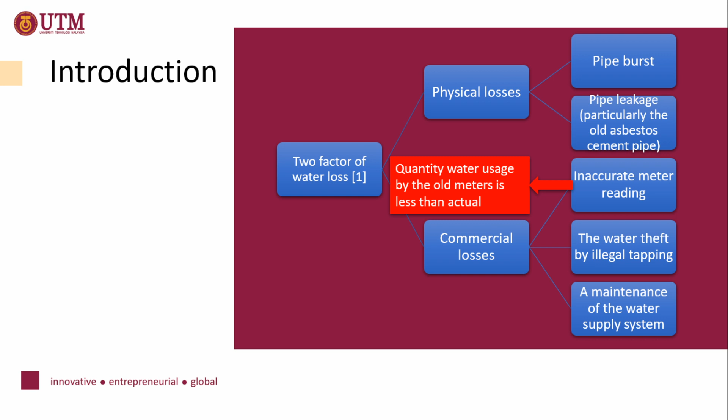For the inaccurate meter reading, it means that the quantity of water usage recorded by the meter is less than actual. And for maintenance of the water supply system, for example pipe flushing after leakage repair work, reservoir cleaning, and brigade usage.

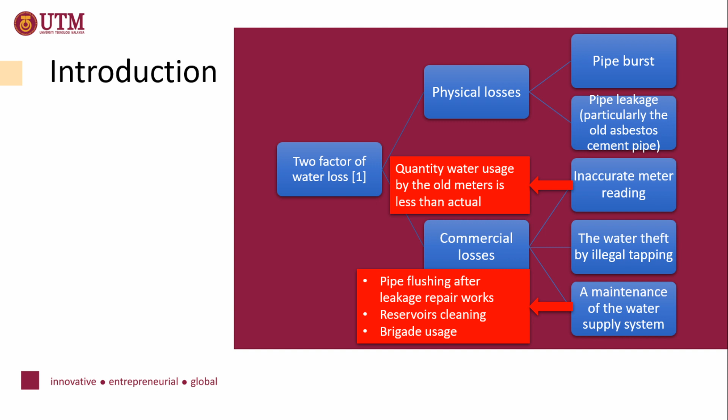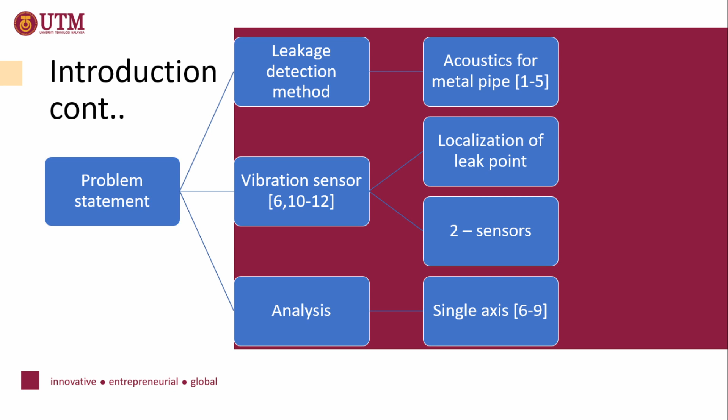The problem statement of this research is, first, the leakage detection method. Nowadays they use the acoustic method, but the acoustic method is very accurate to detect leakage only on metal pipe. Second is the vibration sensor, which is the location of the leak; we can identify the location of the leak with two sensors. And third is analysis. Now they use single axis for analysis.

For the acoustic method on the PVC pipeline there is a problem: because the PVC pipeline is soft and elastic, it will absorb the sound from the leaks. So that's why in this study we propose the vibration sensor.

For localization, we use cross correlation analysis. For this research, we apply cross correlation analysis on two wireless sensor data to identify the location of the leak point. And in this research we use 3 axes. For single axis, normally they put the sensor parallel with the water pipeline; the axis is parallel with the water pipeline.

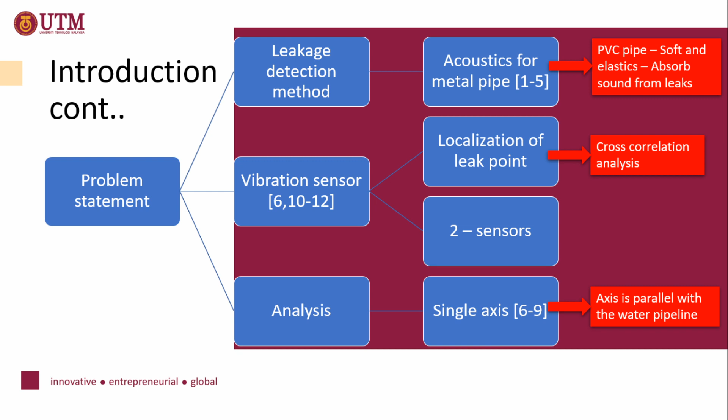This research objective is to investigate the application of the cross correlation technique in localizing the leakage in ABS pipe using a wireless 3-axis vibration sensor, which is the accelerometer sensor ADXL335.

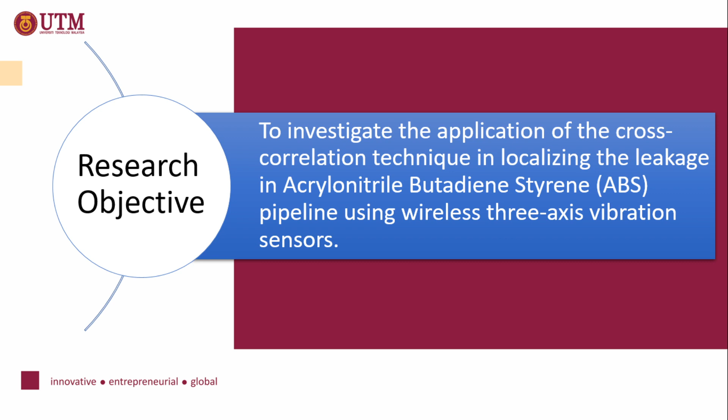In theory, we can identify the leakage location using this equation: distance equals distance between sensors minus wave speed multiplied by time difference, divided by 2. So we can get the location of the leak point.

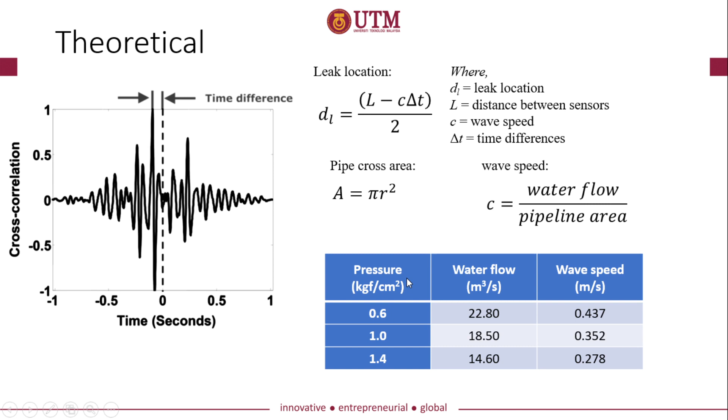Our test bed has a water flow sensor to identify the water flow inside the water pipeline. However, we need to find the wave speed from the water flow data. So we use this equation: wave speed is equal to water flow divided by pipe area. We use a pipeline size of 1 inch, equal to 0.0254.

This is our water pipe leakage localization test bed. First, we have a valve. The function of the valve is to control the water flow and water pressure inside the pipeline. Second is the pressure gauge, to measure the pressure inside the pipeline. There is the water pump, whose function is to give the water flow rate and water pressure inside the pipeline.

There is the meter to measure the water flow rate. Next is the ABS pipe, and then the vibration sensor. For the vibration sensor we use an accelerometer wireless sensor through ZigBee, the accelerometer ADXL335. We use two wireless sensors, then we vary the distance from the leakage from 0.5 to 2.2 meters.

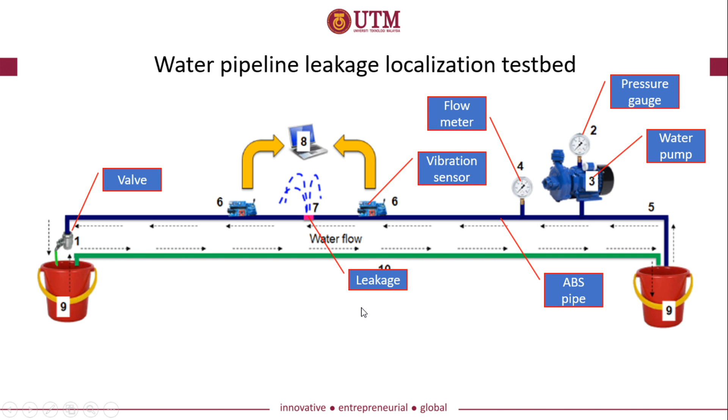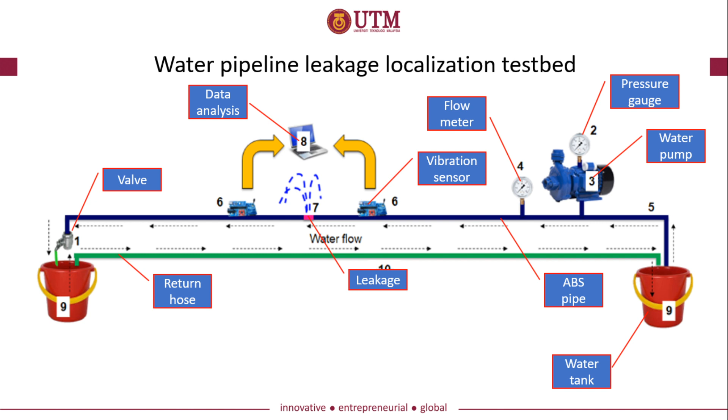There is the leakage simulation. In this case, the leakage is 1 mm diameter. There is the data analysis, to analyze all the data from the sensor offline. There is the water tank to supply water to the system. Return hose.

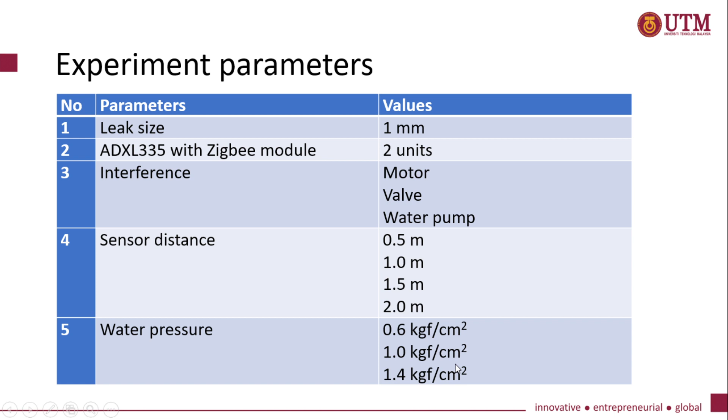There are the experiment parameters. We set the leakage size at 1 mm as I mentioned before. We use the ADXL335 as the accelerometer sensor, through the ZigBee Pro module, interference from the motor, valve, and water pump. For sensor distance, we set the distance from the leakage point at 0.5, 1, 1.5 and 2. And the water pressure we vary from 0.6 kgf/cm², 1.0 and 1.4.

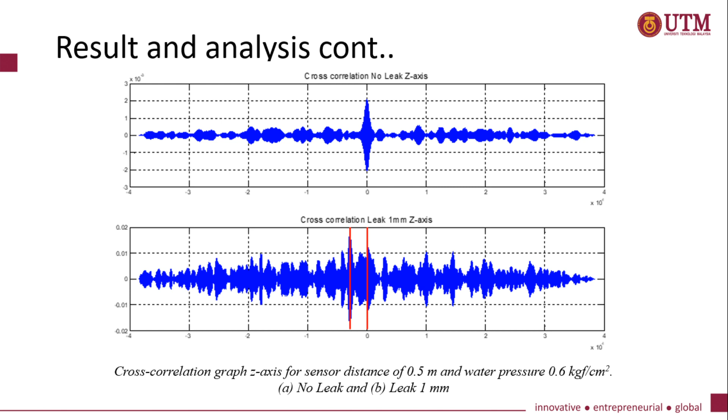There is the result we get. For example, at 0.6, we can identify the leakage. The distance is 0.49 to 0.51 based on the data below. So the difference is about 0.01 meters.

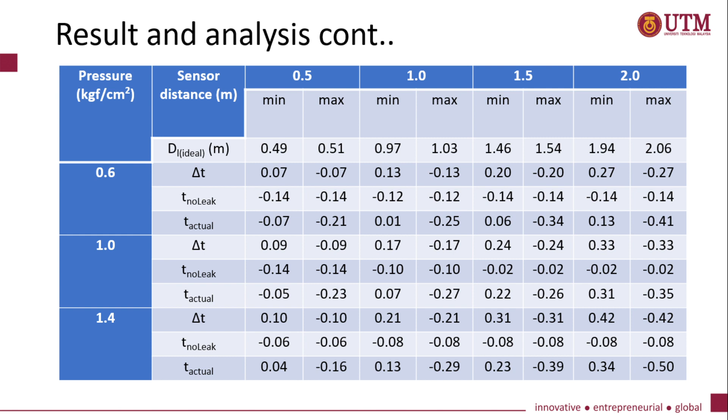From all the data, we can conclude that the leakage location error using this technique is 2.9%. A very low error. So this technique can identify the leakage location.

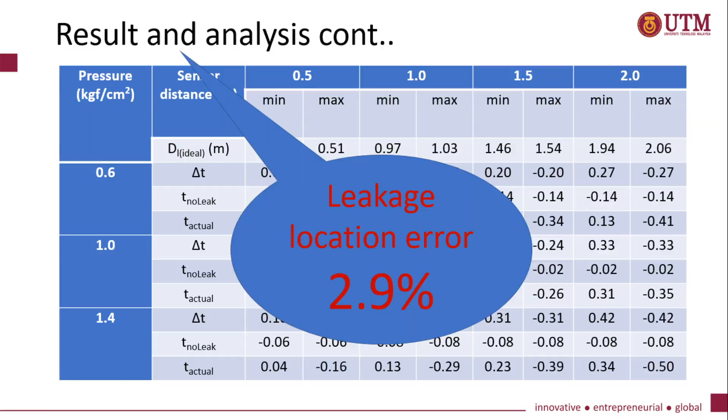The conclusion is, first, 2 vibration sensors can detect the leakage in ABS pipeline in all 3 axes regardless of the leakage distance and the water pressure. Second, the ADXL335 vibration sensor only provides high accuracy of the leak location calculation for certain water pressure, sensor distance and limited axes.

Therefore, our recommendation to improve the equation: we need to add a time buffer. The time buffer comes from the time to send the data through wireless communication.